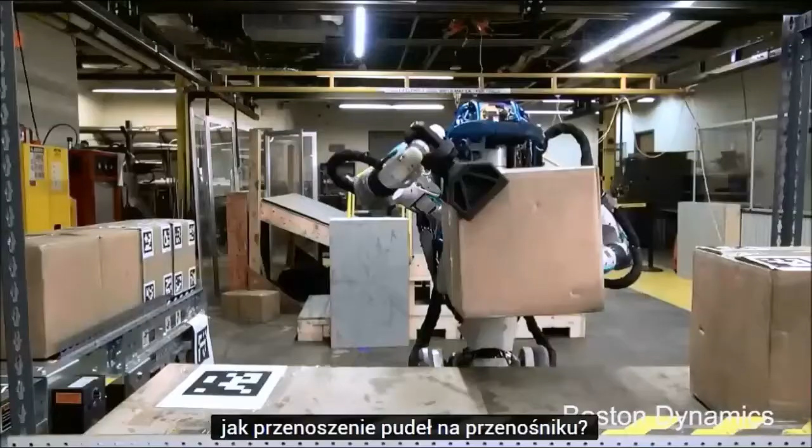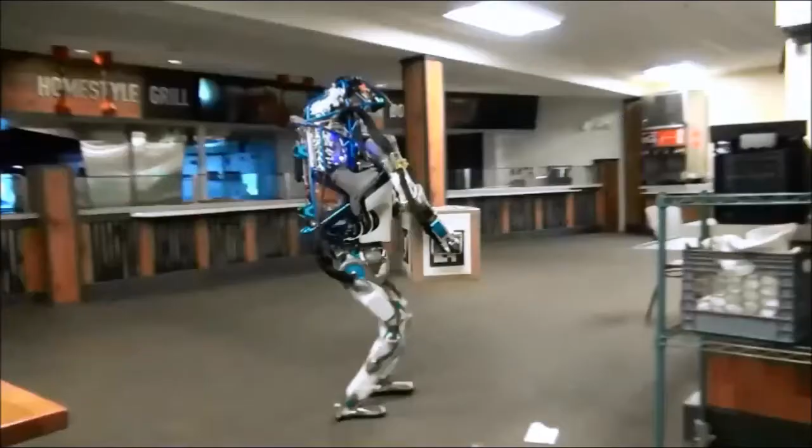Here, we actually have two Atlases. Now, everything doesn't go exactly the way it's supposed to.

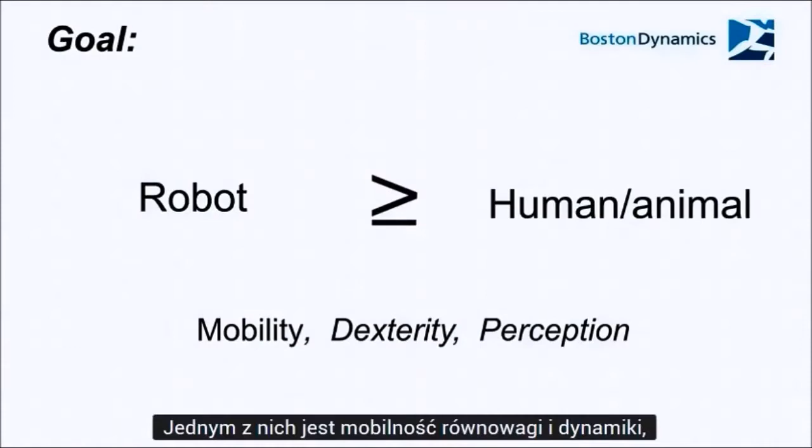That's SpotMini. He'll be back in a little while. I love building robots. And my long-term goal is to build robots that can do what people and animals do. And there's three things in particular that we're interested in. One is balance and dynamic mobility. The second one is mobile manipulation. And the third one is mobile perception. So dynamic mobility and balance. I'm going to do a demo for you.

I'm standing here balancing. I can see you're not very impressed. Okay, how about now? How about now? Those simple capabilities mean that people can go almost anywhere on Earth on any kind of terrain, and we want to capture that for robots.

What about manipulation? I'm holding this clicker in my hand. I'm not even looking at it, and I can manipulate it without any problem. But even more important, I can move my body while I hold the manipulator, the clicker, and stabilize and coordinate my body, and I can even walk around. And that means that I can move around in the world and expand the range of my arms and my hands and really be able to handle almost anything. So that's mobile manipulation. And all of you can do this.

And third is perception. You know, I'm looking out at a room with over 1,000 people in it, and my amazing visual system can see every one of you. You're all stable in space, even when I move my head, even when I move around. That kind of mobile perception is really important for robots that are going to move and act out in the world. So I'm going to give you a little status report on where we are in developing robots toward these ends.

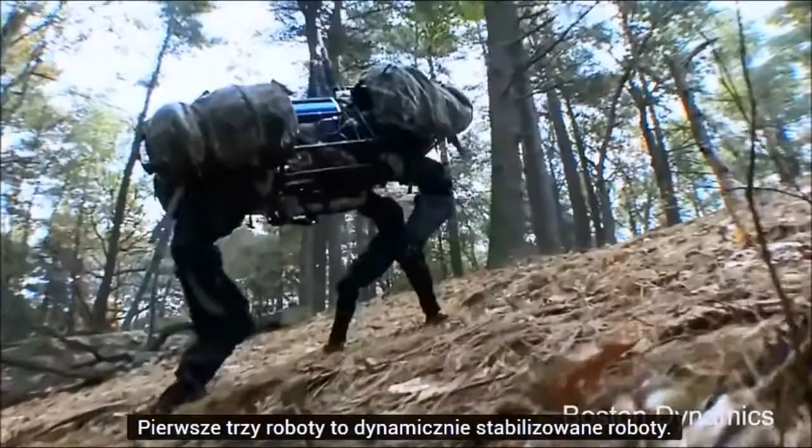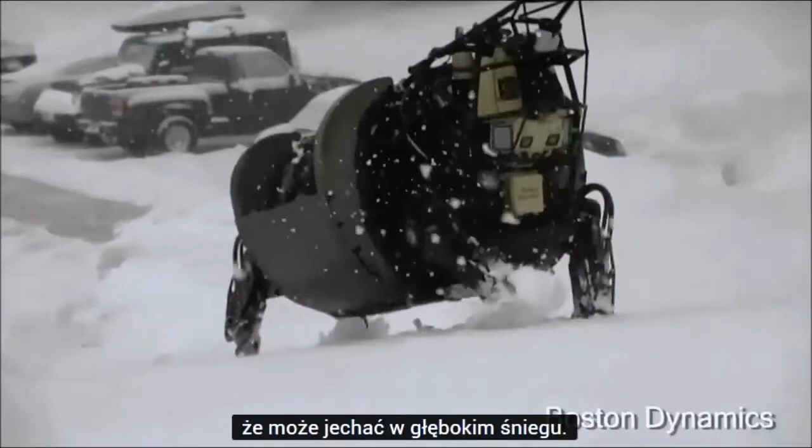The first three robots are all dynamically stabilized robots. This one goes back a little over 10 years ago, BigDog, and it's got a gyroscope that helps stabilize it. It's got sensors and a control computer. Here's a cheetah robot that's running with a galloping gait where it recycles its energy, it bounces on the ground, and it's computing all the time in order to keep itself stabilized and propelled. And here's a bigger robot that's got such good locomotion using its legs that it can go in deep snow. This is about 10 inches deep, and it doesn't really have any trouble.

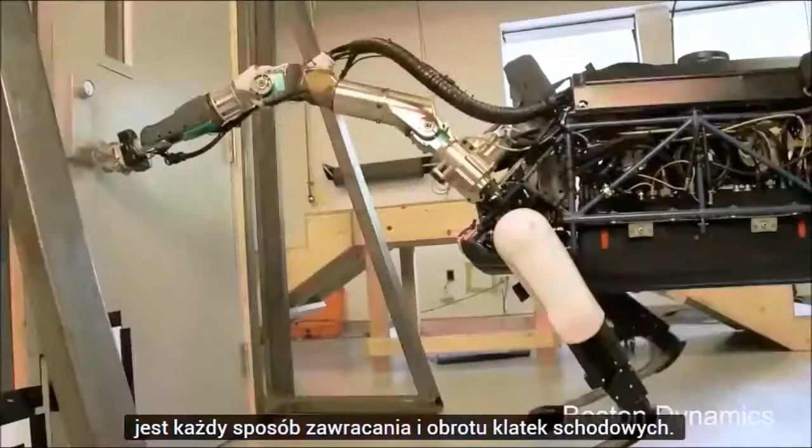This is Spot, a new generation of robot, just slightly older than the one that came out on stage. And we've been asking the question, you know, you've all heard about drone delivery. Can we deliver packages to your houses with drones? Well, what about plain old legged robot delivery? So we've been taking our robot to our employees' homes to see whether we could get in the various access ways. And believe me, in the Boston area, there's every manner of stairway, twists and turns. And so it's a real challenge, but we're doing very well, about 70% of the ways.

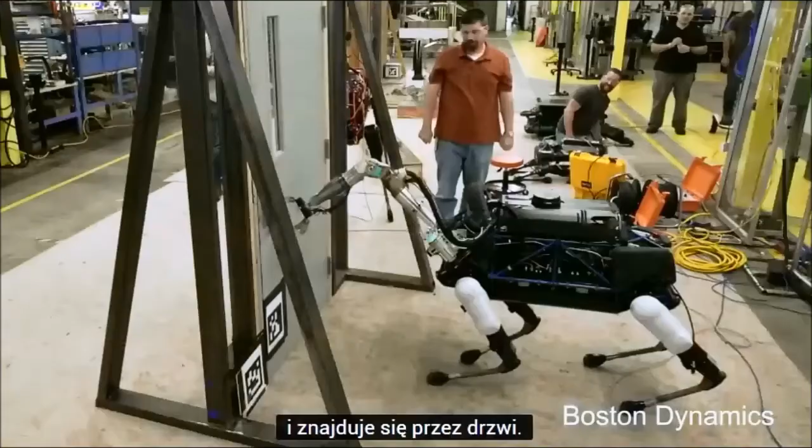And here's mobile manipulation, where we've put an arm on the robot, and it's finding its way through the door. Now, one of the important things about making autonomous robots is to make them not do just exactly what you say, but make them deal with the uncertainty of what happens in the real world. So we have Steve there, one of the engineers, giving the robot a hard time. And the programming still tolerates all that disturbance; it does what it's supposed to.

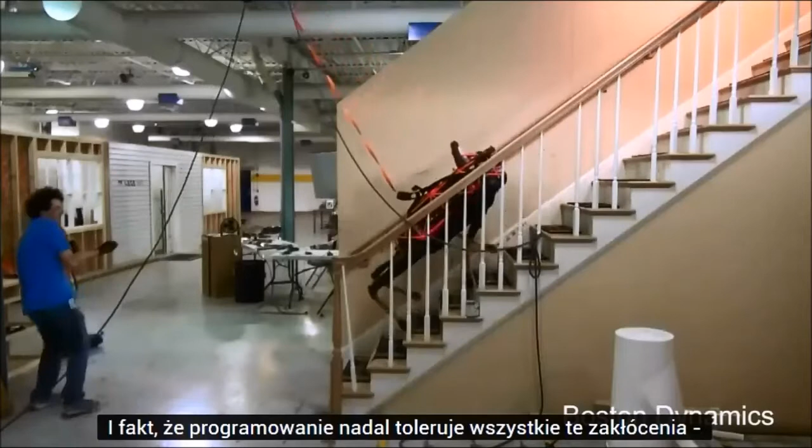Here's another example where Eric is tugging on the robot as it goes up the stairs. And believe me, getting it to do what it's supposed to do in those circumstances is a real challenge, but the result is something that's going to generalize and make robots much more autonomous than they would be otherwise.

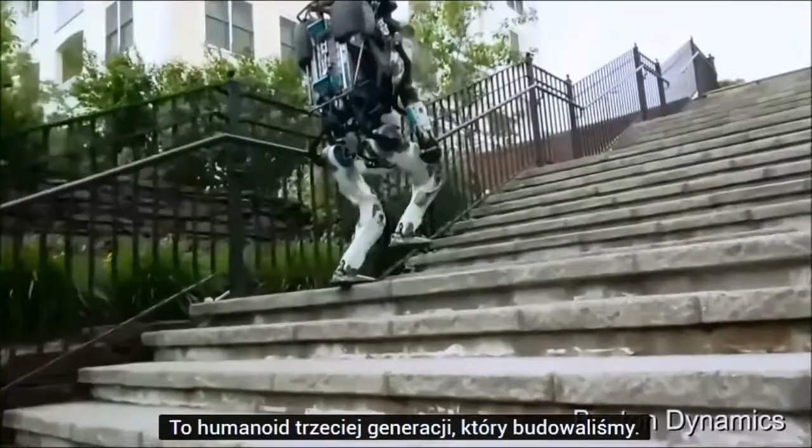This is Atlas, a humanoid robot. It's a third generation humanoid that we've been building. I'll tell you a little bit about the hardware design later. And we've been saying, how close to human levels of performance and speed could we get in an ordinary task like moving boxes around on a conveyor?

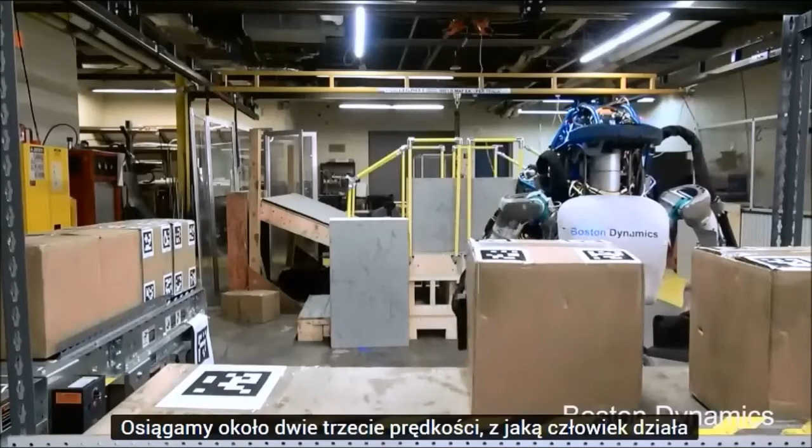And you know, we're getting up to about 2/3 of the speed that a human operates on average. And this robot is using both hands, it's using its body, it's stepping. So it's really an example of dynamic stability, mobile manipulation, and mobile perception. Here, we actually have two Atlases. Now, everything doesn't go exactly the way it's supposed to.

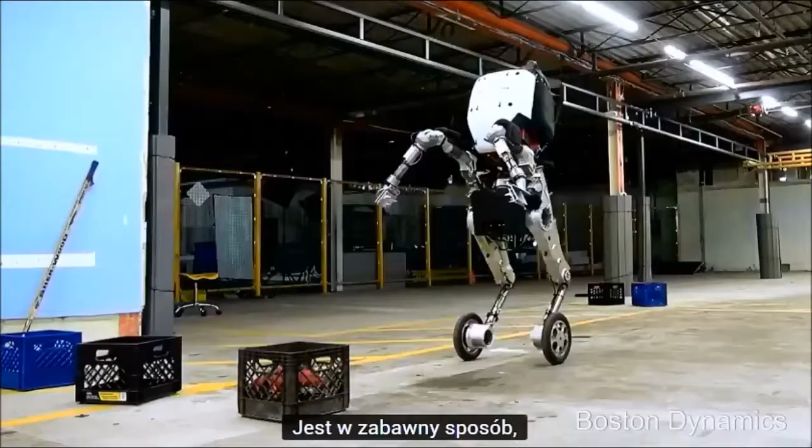And here's our latest robot called Handle. Handle is interesting because it's sort of half like an animal and it's half something else with these leg-like things and wheels. It's got its arms on in kind of a funny way. But it really does some remarkable things.

It can carry 100 pounds. It's probably going to lift more than that, but so far we've done 100. It's got some pretty good rough terrain capability, even though it has wheels. And Handle loves to put on a show.

I'm going to give you a little bit of robot religion. A lot of people think that a robot is a machine where there's a computer that's telling it what to do, and the computer is listening through its sensors. But that's really only half of the story. The real story is that the computer is on one side making suggestions to the robot, and on the other side are the physics of the world. And that physics involves gravity, friction, bouncing into things.

And in order to have a successful robot, my religion is that you have to do a holistic design where you're designing the software, the hardware, and the behavior all at one time, and all these parts really intermesh and cooperate with each other. And when you get the perfect design, you get a real harmony between all those parts interacting with each other. So it's half software and half hardware plus the behavior.

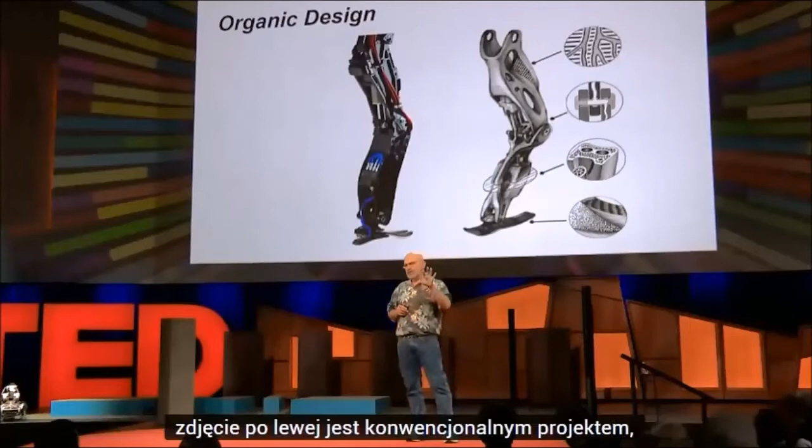We've done some work lately on the hardware. On the picture on the left is a conventional design where you have parts that are all bolted together, conductors, tubes, connectors. And on the right is a more integrated thing. It's supposed to look like an anatomy drawing. And using the miracle of 3D printing, we're starting to build parts of robots that look a lot more like the anatomy of an animal.

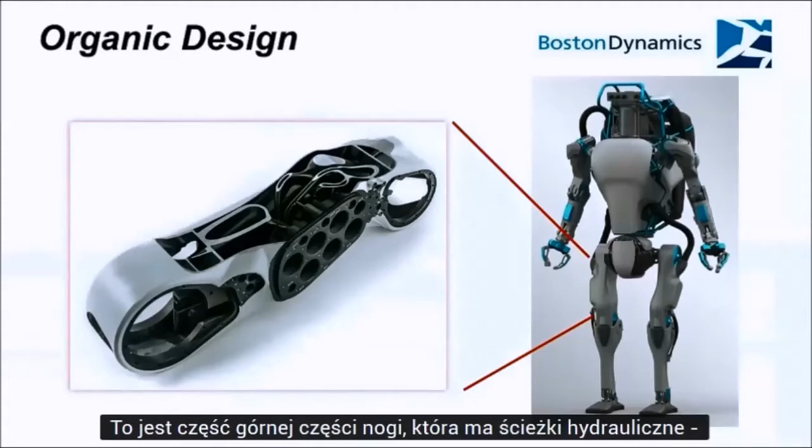So that's an upper leg part that has hydraulic pathways, actuators, filters, all embedded, all printed as one piece. And the whole structure is developed with the knowledge of what the loads and behavior are going to be, which is available from data recorded from robots and simulations and things like that. So it's a data-driven hardware design.

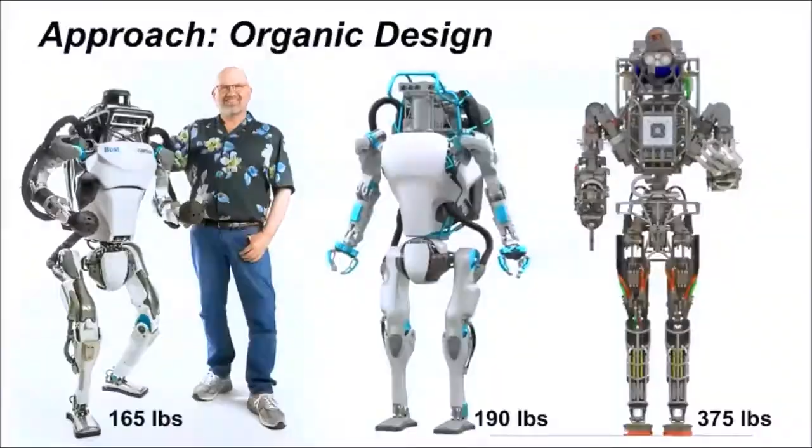And using processes like that, not only the upper leg, but some other things, we've gotten our robots to go from big, behemoth, bulky, slow, bad robots, that one on the right, weighing almost 400 pounds, down to the one in the middle, which was just in the video, weighs about 190 pounds, just a little bit more than me. And we have a new one, which is working, but I'm not going to show it to you yet, on the left, which weighs just 165 pounds with all the same strength and capability. So these things are really getting better very quickly.

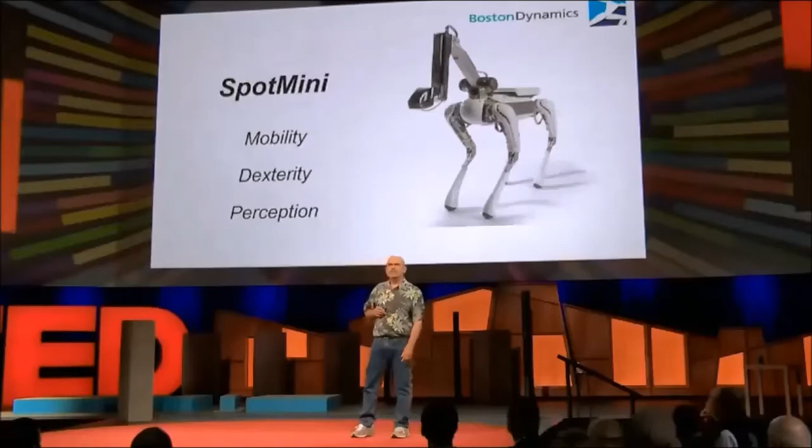So it's time for Spot to come back out, and we're going to demonstrate a little bit of mobility, dexterity, and perception. So this is Seth Davis, who's my robot wrangler today, and he's giving Spot some general direction by steering it around, but all the coordination of the legs and the sensors is done by the robot's computers on board. The robot can walk with a number of different gaits.

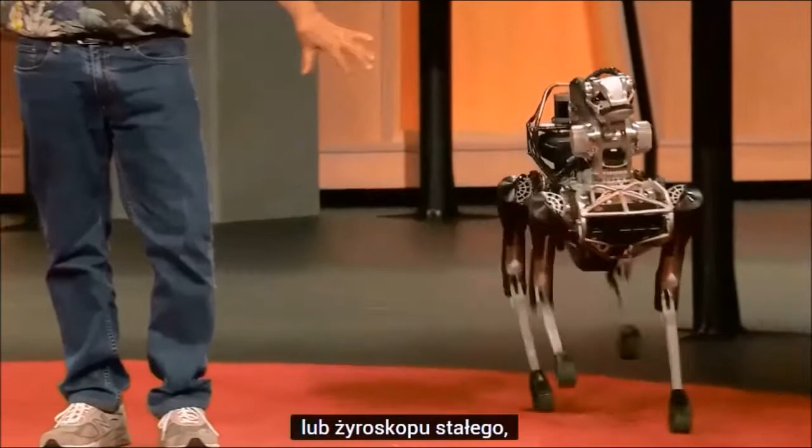It's got a solid-state gyro, an IMU on board. Obviously, it's got a battery and things like that. Now, one of the cool things about a legged robot is it's omnidirectional. In addition to going forward, it can go sideways. It can turn in place.

And this robot's a little bit of a show-off. It loves to use its dynamic gaits, like running. And it's got one more. Now, if it really is a show-off, it would be hopping on one foot, but, you know.

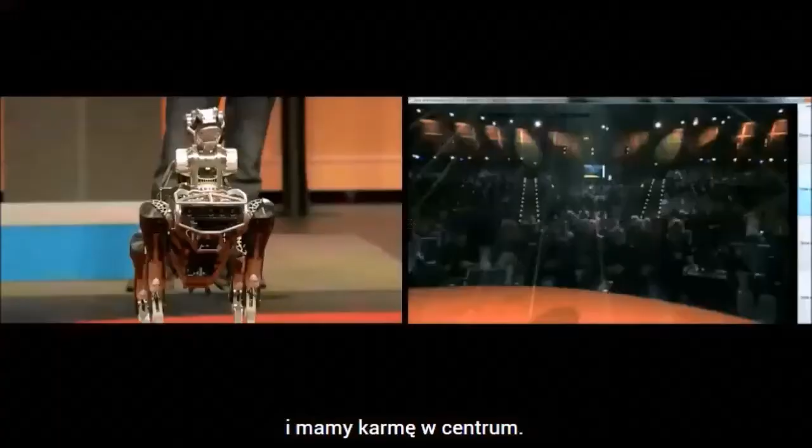Now, Spot has a set of cameras here, stereo cameras, and we have a feed up in the center. It's kind of dark out in the audience. But it's going to use those cameras in order to look at the terrain right in front of it while it goes over these obstacles back here. Now, for this demo, Seth is steering, but the robot's doing all its own terrain planning.

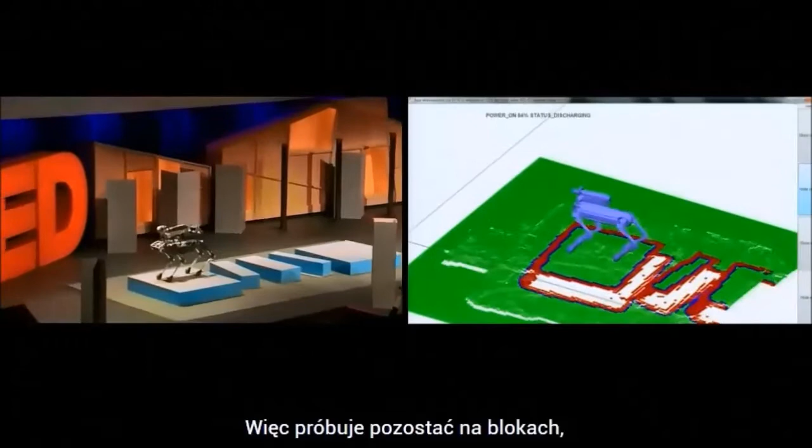This is a terrain map where the data from the cameras is being developed in real time, showing the red spots, which are where it doesn't want to step, and the green spots are the good places. And here it's treating them like stepping stones. So it's trying to stay up on the blocks, and it adjusts its stride. And there's a ton of planning that has to go into an operation like that, and it does all that planning in real time where it adjusts the steps a little bit longer or a little bit shorter.

Now we're going to change it into a different mode where it's just going to treat the blocks like terrain and decide whether to step up or down as it goes. So this is using dynamic balance, dynamic mobile perception, because it has to coordinate what it sees along with how it's moving.

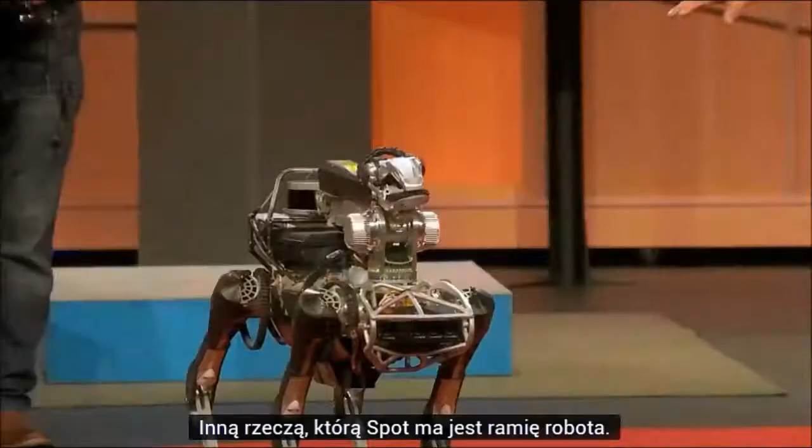Now the other thing Spot has is a robot arm. Some of you may see that as a head and a neck, but believe me, it's an arm. And Seth is driving it around. Now he's actually driving the hand and the body is following. So the two are coordinated in the way I was talking about before, the way people can do that.

And in fact, one of the cool things that Spot can do, we call chicken head mode, and it keeps its head in one place in space and it moves its body all around. There's a variation of this that's called twerking, but we're not gonna use that today.

So Spot, I'm feeling a little thirsty. Could you get me a soda? Now for this demo, Seth is not doing any driving. We have a LiDAR on the back of the robot and it's using these props we put on the stage to localize itself. It's gone over to that location.

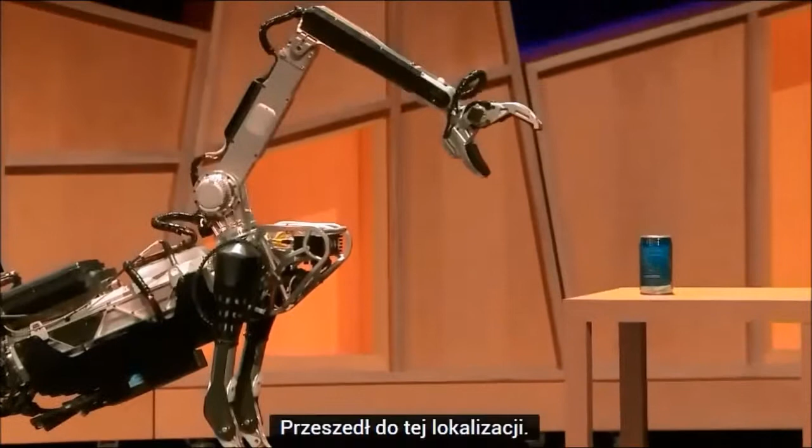Now it's using a camera that's in its hand to find the can, picks it up, and again, Seth's not driving. So we've planned out a path for it to go. It looked like it was going off the path. And now Seth's going to take over control again because I'm a little bit chicken about having it do this by itself. Thank you, Spot.

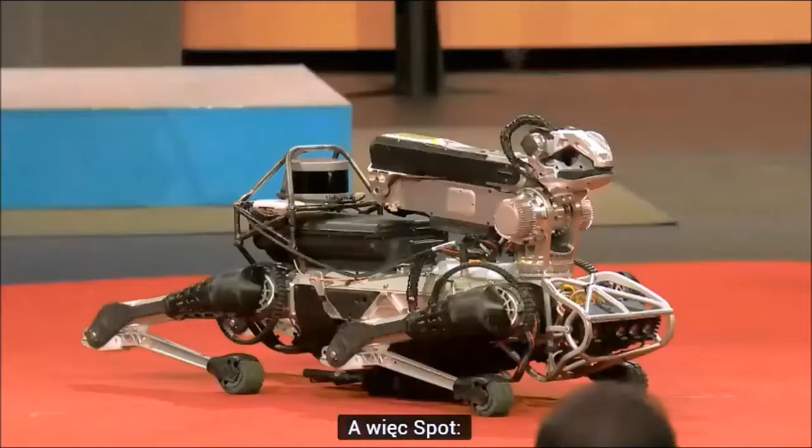So Spot, how do you feel about having just finished your TED performance? Me too. Thank you all, and thanks to the team at Boston Dynamics who did all the hard work behind this.

Marc, come back in the middle. Thank you so much. Come over here.

I have questions. So you mentioned UPS and the package delivery. What are the other applications that you see for your robots? You know, I think that robots that have the capabilities I've been talking about are going to be incredibly useful. About a year ago, I went to Fukushima to see what the situation was there. And there's just a huge need for machines that can go into some of the dirty places and help remediate that. I think it won't be too long until we have robots like this in our homes.

And you know, one of the big needs is to take care of the aging and invalids. I think that it won't be too long till we're using robots to help take care of our parents, or probably more likely have our children help take care of us. And there's a bunch of other things. I think the sky's the limit. I mean, many of the ideas we haven't thought of yet, and people like you will help us think of new applications. So what about the dark side?